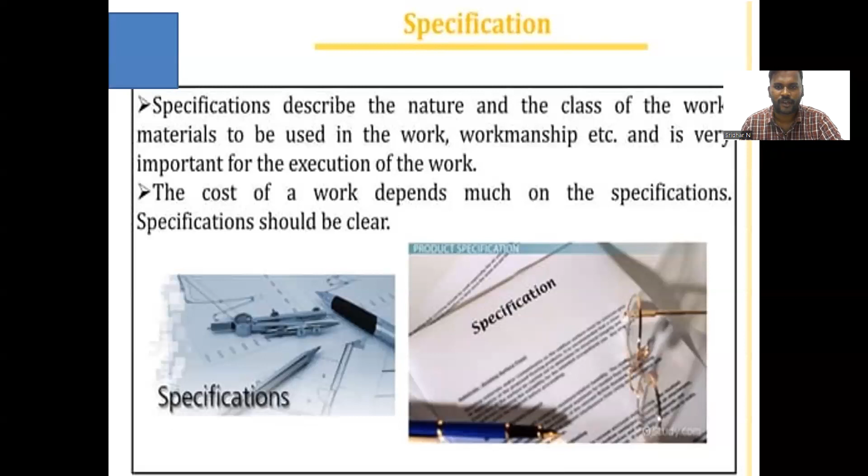Next, coming to the purpose of the specification. Why do we go for the specification? The cost of unit quantity of work is always governed by the specification. The cost of unit quantity of work means the cost of each material we are using in the construction.

Next point: to describe the quality and quantity of different materials procured for the construction. Whatever work we are carrying out during the construction process, each one depends on different materials. So each material should be tested for whatever quantity we require, and we must check the quality of that particular material. So the specification plays a vital role.

It is also one of the essential contract documents. It specifies the workmanship and the method of doing it. It also serves as a guide for the contractor and for monitoring how the work is going on. If work is carried out according to the specification, the contractor is paid for the same.

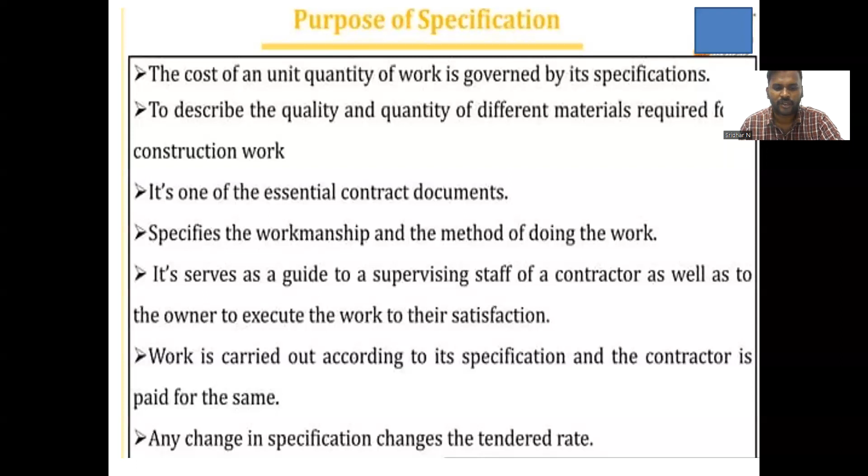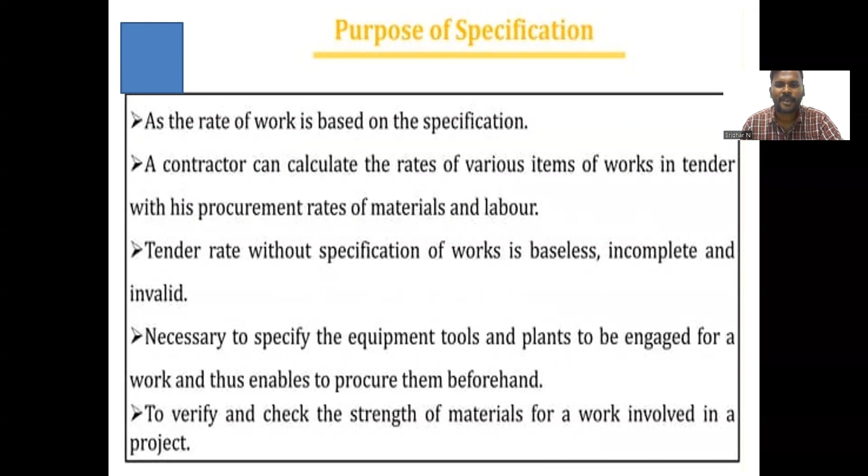Any change in specification changes the tender rate also. So it is crystal clear the rate of each work is based on the specification. A contractor can calculate the rate of each work carried out in the project. So a tender rate without the specification of the work is baseless, incomplete, and invalid.

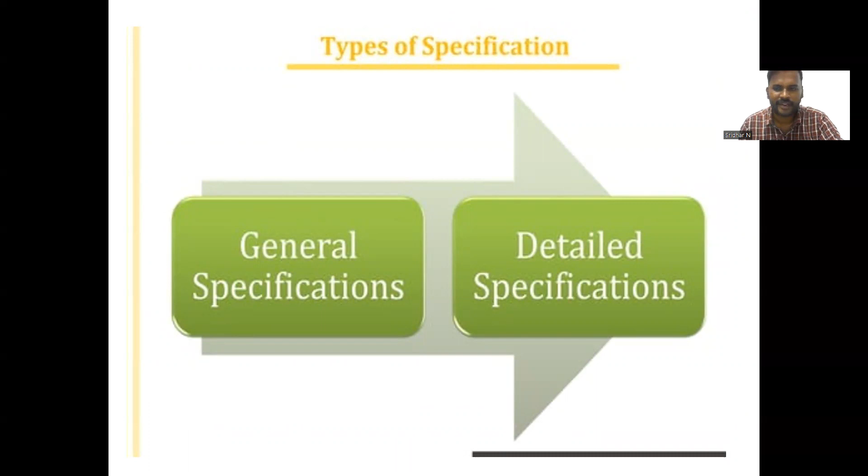Coming to the types of specification: general specification and detailed specification. What is the major difference between them? General specification only describes the nature and class of the work and the name of the material. Detailed specification gives how much quantity is required for each work in detail. That is the major difference between the general and detailed specification.

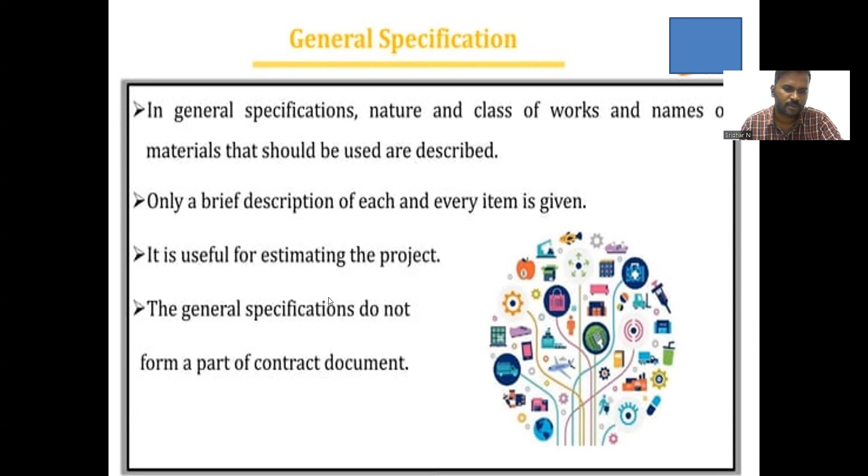It is used for estimating the project. General specification is not included in the contract document, but detailed specification is included in the contract document. The detailed specification forms part of the contract document, and it specifies the quality, quantity, and proportion of the material and the method of preparation and execution. All the details should be in the detailed specification. But the general specification gives only the nature and class of the work.

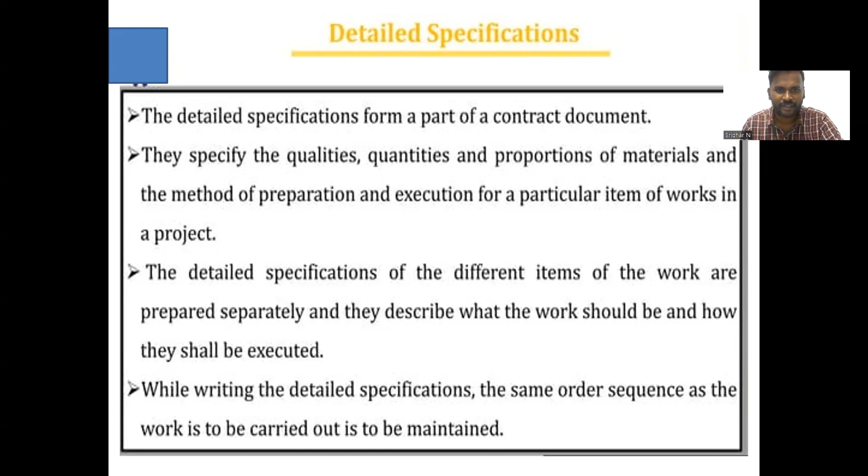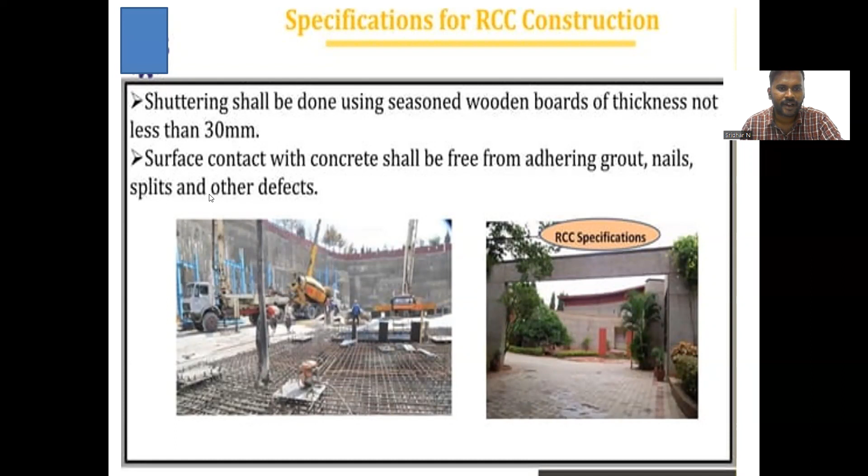For example, the specification for RCC construction. Shuttering shall be done using seasoned wooden boards of thickness not less than 30 mm. This not less than 30 mm is the specification for that particular RCC. The surface in contact with concrete shall be free from adhering grout, nails, splits, and other defects. These are the general points for RCC construction.

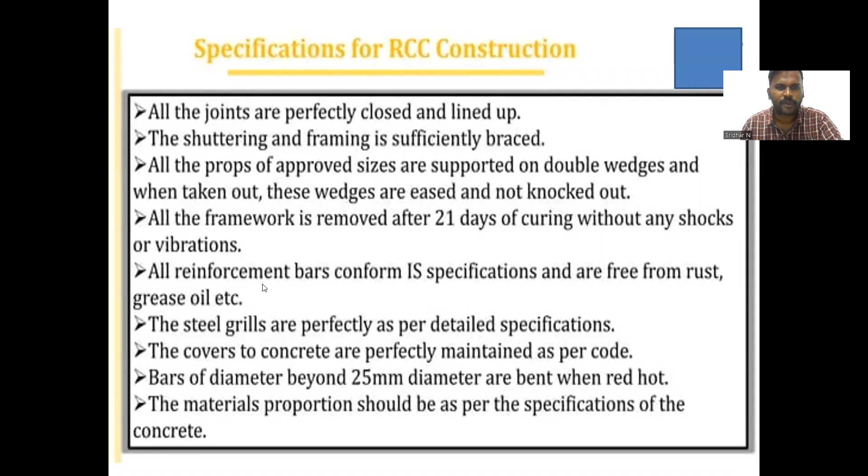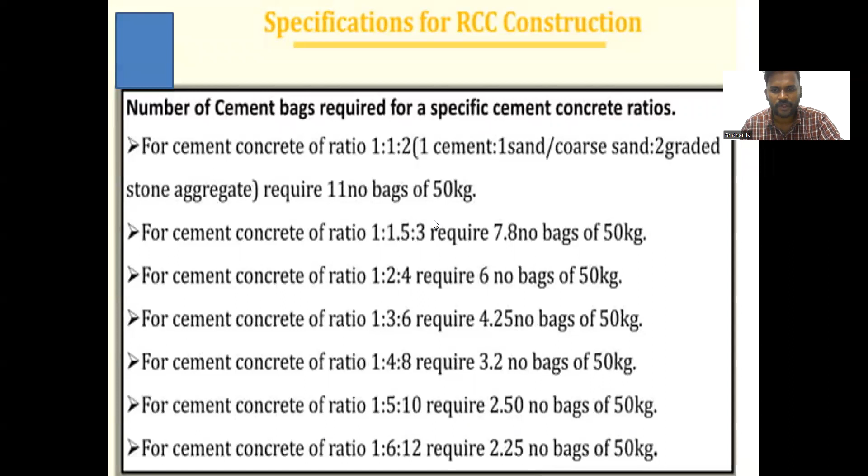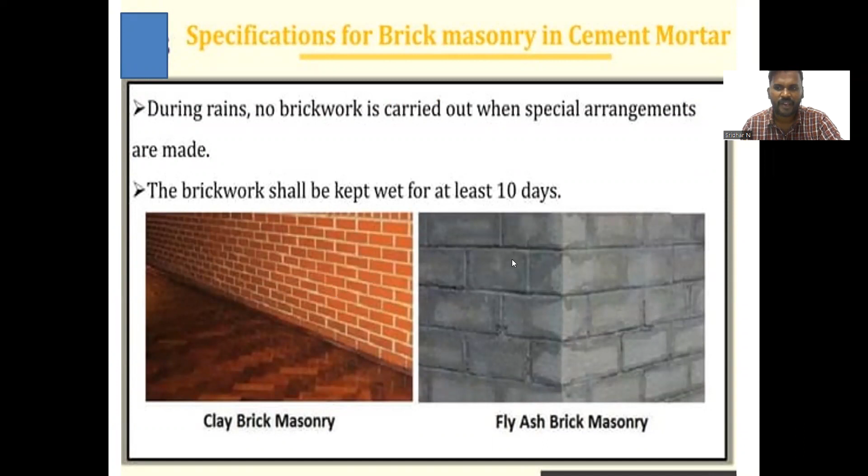How many cement bags should be used for the different ratios? If we use the concrete ratio 1:1:2, that is one part cement, one part sand, and two parts aggregate, it requires 11 bags of 50 kg. Similarly, for each concrete ratio, how many bags of cement are required. Next, similarly for brick masonry, how many bricks are required for 1 cubic meter, and if we use fly ash bricks, how many are required.

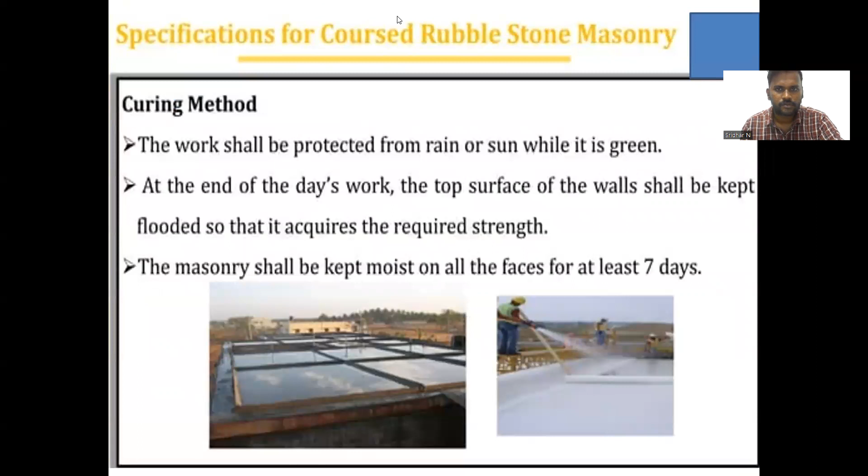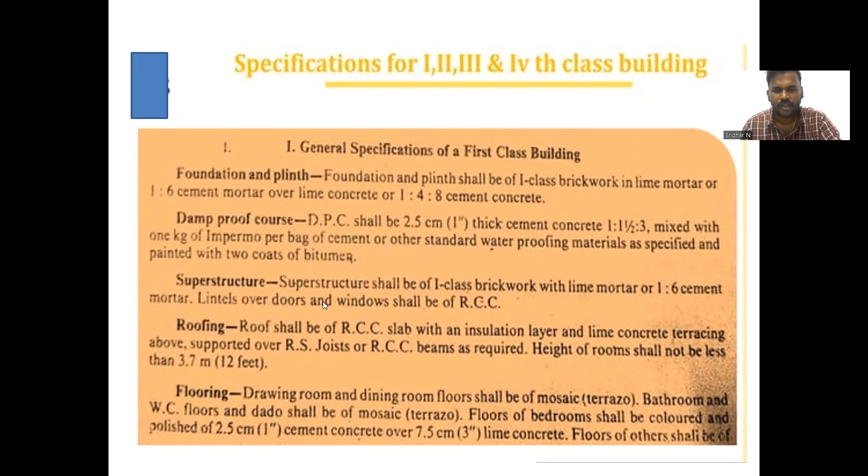This is an example showing the general specification of a first class building. In a first class building, foundation and plinth should be in lime, with 1:6 cement mortar, or 1:4:8, likewise for the different stages of construction of the building: first foundation, next DPC, next superstructure, next roofing and flooring. Whatever specification we carry out in the first class building is mentioned here.

Similarly, second class building, third class building, and fourth class building. The different parts are foundation, superstructure, roofing, flooring, finishing, and doors and windows.